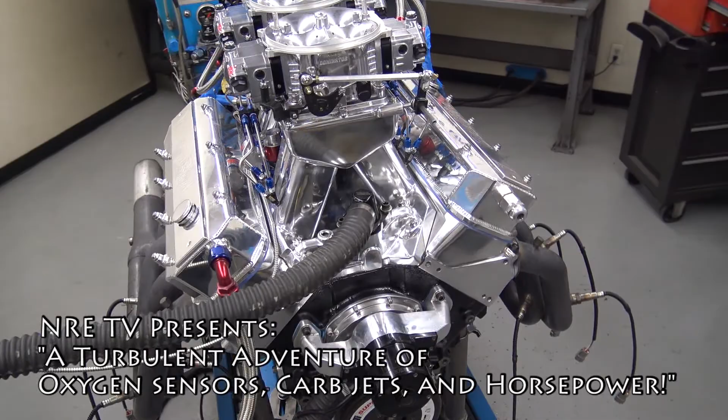632 cubic inch, big block Chevy, Dual Dominators with a tunnel ram. Got an individual nitrous system, and we just made 942 horsepower. And learned a little something from Mr. Brule here on individual O2 tuning on a carburetor.

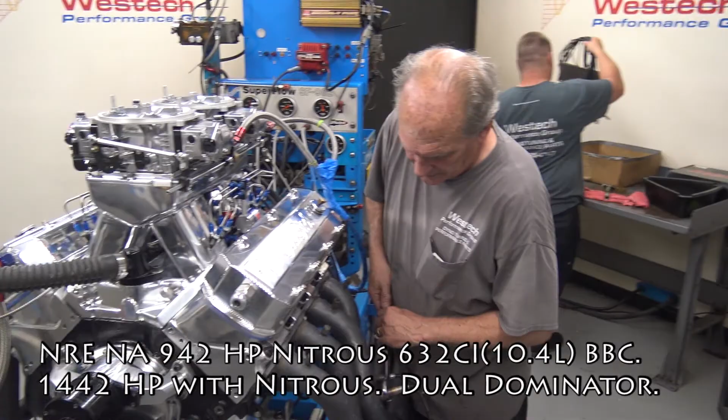Who would ever think it could be that far off? That's crazy. We've got between the biggest and smallest, we've got a 22 jet spread. That's, yeah, 85 to 68. 95 to 68. Oh, in the back. Yeah.

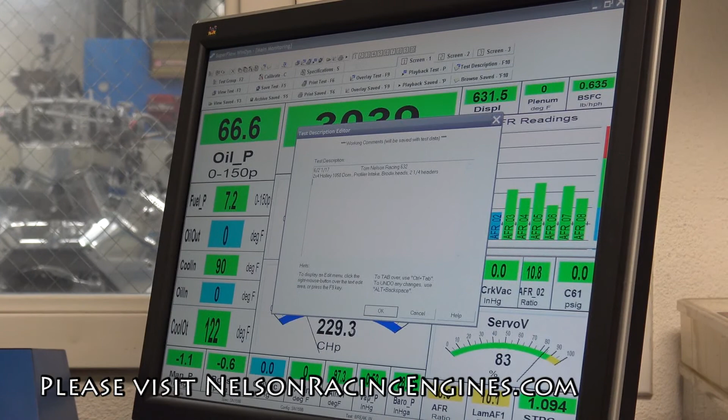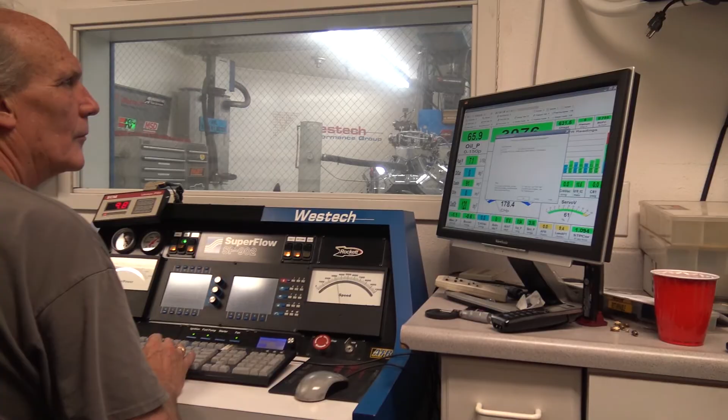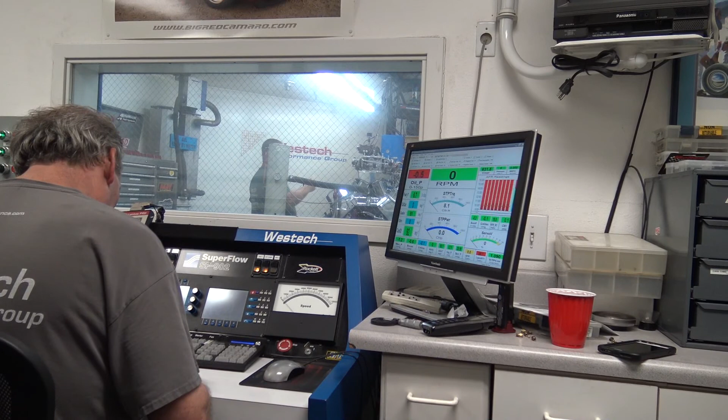So we did a first initial pull, super pig fat rich. Steve stopped a little early, and I think I saw like 886 on the screen. At 6,000. At 6,000. I like the 830 pound-feet at 5,000. Yeah. And that's not peak. 830 foot-pounds, 886 horsepower. I think the floats have to come up some more.

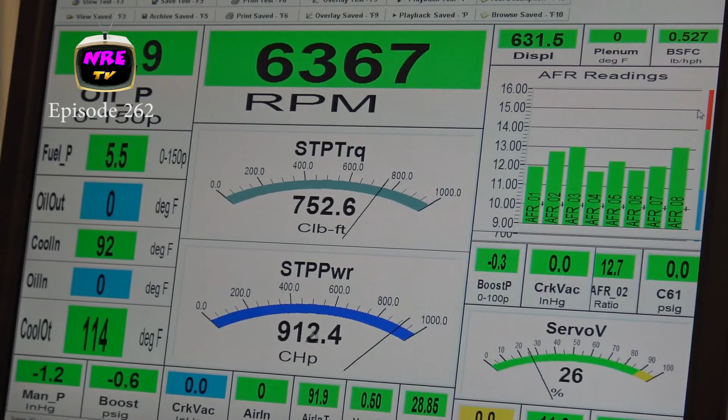There's our first pull. We just pulled 85 in the main to 78 on both, and we're going to re-hit it and see what happens. Nice. I grabbed it a little higher too, but it's not going to want to rev real high with this camshaft and this many cubic inches. What RPM was that? 6,500. So now we'll look at individuals, and this is where we start picking away at different stuff.

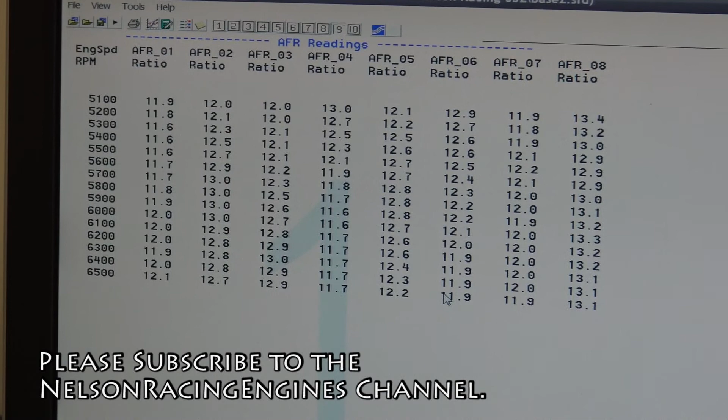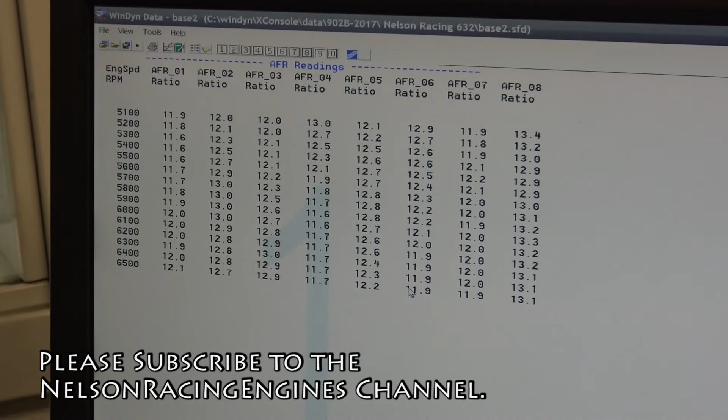So 4, 6. Okay, so I need a pen because now we got to start getting into the individual stuff to clean it up. So what Steve did here, he's got O2s, one on each cylinder. Every cylinder is a different air-fuel ratio. He's going to start jotting down stuff on paper, and we're going to start individually jetting holes to try to bring each cylinder to the correct air-fuel ratio.

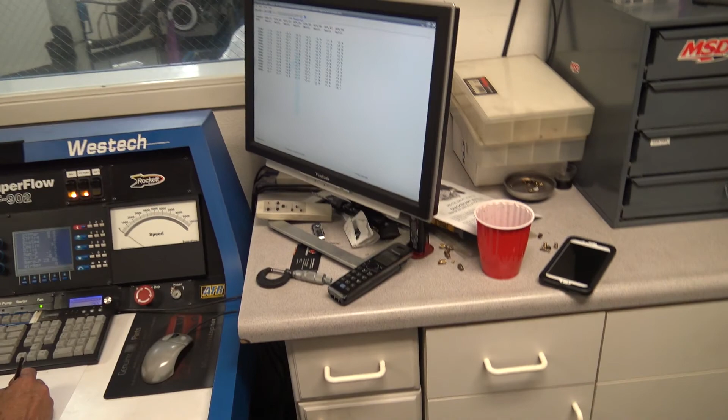Number 3 is okay for now. Number 4 is going to be minus 6, which is good. It helps on the primary side. Yeah. Yesterday when I ran a motor, I had as much as a 110 in 2 holes. 80 in another. That's insane. And it's very normal to have 15 jet number spreads by the time I'm done staring around. Wow.

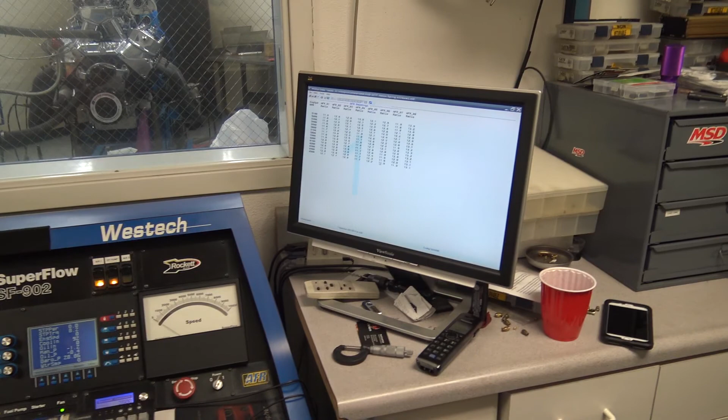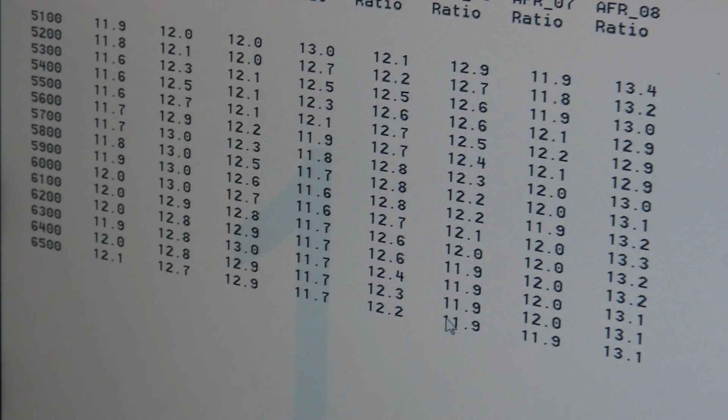On 112, you know, honestly, you can go to 114. Right, yeah. Lose a little torque, but it'll help it carry the motor. Right. Big motor, it'll carry it, yeah.

All right, guys. Sorry for this weird rogue video here, but can't find the tripod, and I'm gonna end up putting this up this week, so you're getting a selfie here.

But basically, the important thing of this video is just showing the individual cylinder tuning with 8 individual air-fuel ratio, 8 individual O2 sensors. So we've got an O2 sensor in every bank, and it's really interesting to see on a carbureted motor with 2 4-barrels, it's basically sitting directly over the runner, CNC ported heads. Everything being the same, the boosters all sitting right over the runners. How different it pulls on each booster in that plenum. There's so much chaos in that plenum. It's amazing to see the differences of what's actually pulling on the booster.

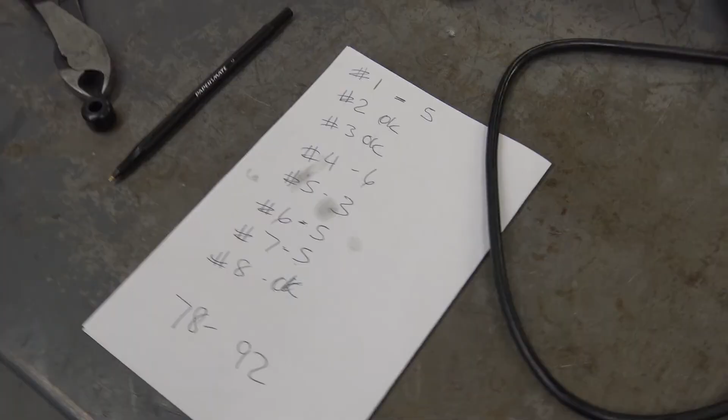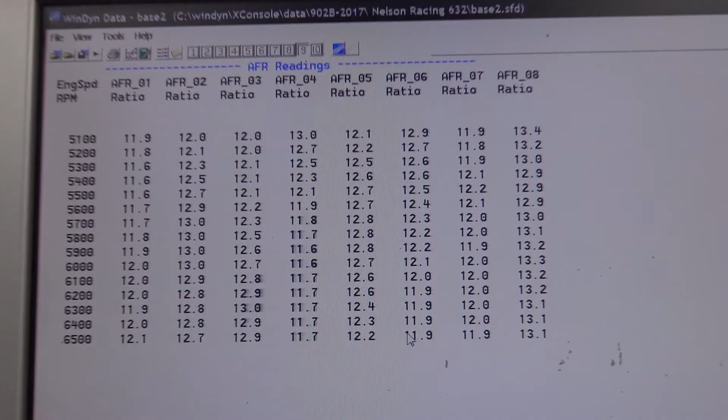So here's our little cheat sheet. We're now at 78 in the front, 92 in the back. And we're pulling individual jets on the secondary. So what you see on these cylinders, where he says -6, -3, -5, -5, on those cylinders we're pulling that much more jet off the 92 number. This is a 78, I need a 72. Let's see what number 4 says. -6.

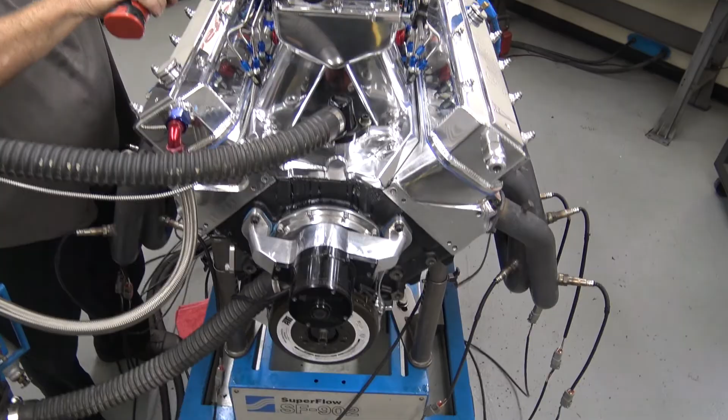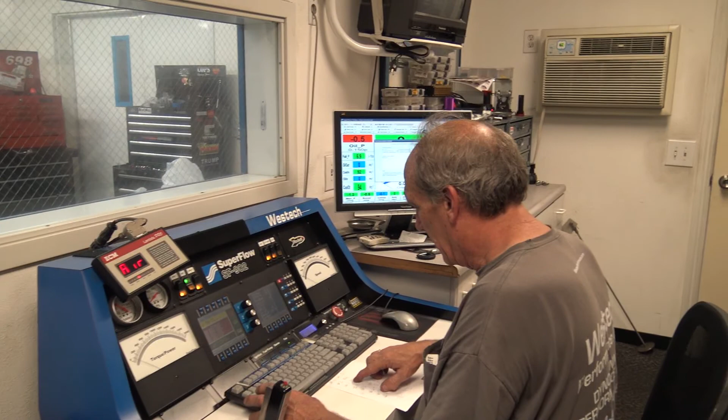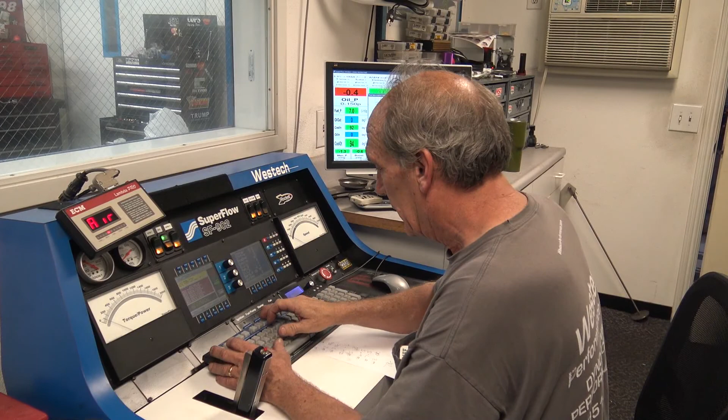Number 1 was a 92, so now it's an 87. Number 2 is still a 78. Number 3 is still a 95. No, 92. 92, yep. So now number 4 is a 72. That was 135, so that's going to be an 87. Number 6 equals, that's a 73.

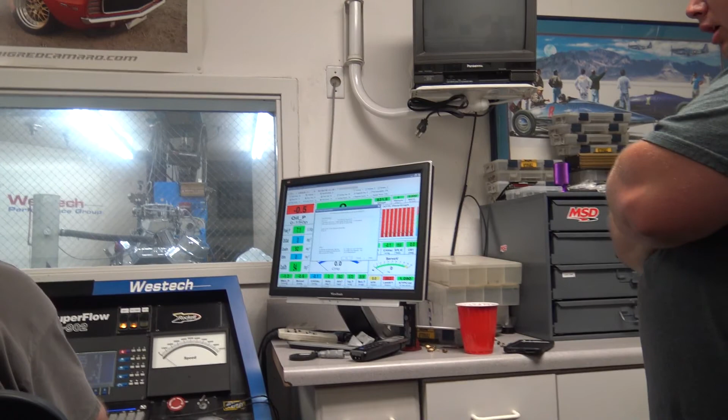That's 9 points, huh? That one? 8. Better, still. It sounds definitely better. It definitely does sound better. It's cleaner for sure. What was it hovering at on the main lambda? 11 out. Yeah.

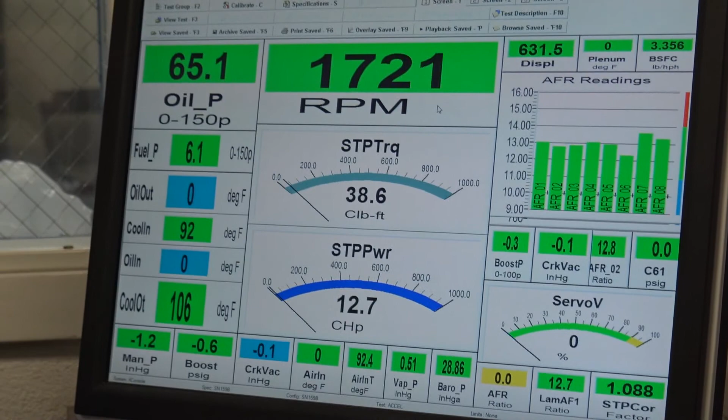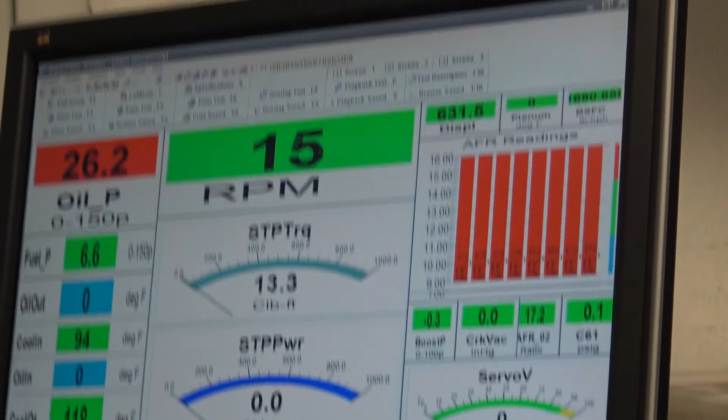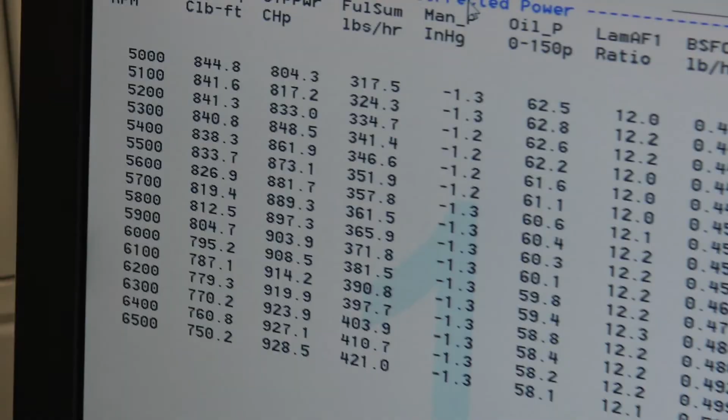Almost 60 foot-pounds I saw. Okay, yeah, I think I saw it at 926 or something. Yeah, 930 horsepower or something. I think I saw 28. 28. Okay. Okay, that's number 4.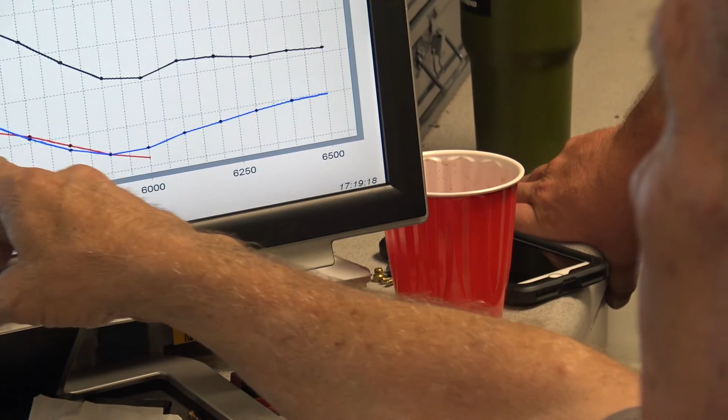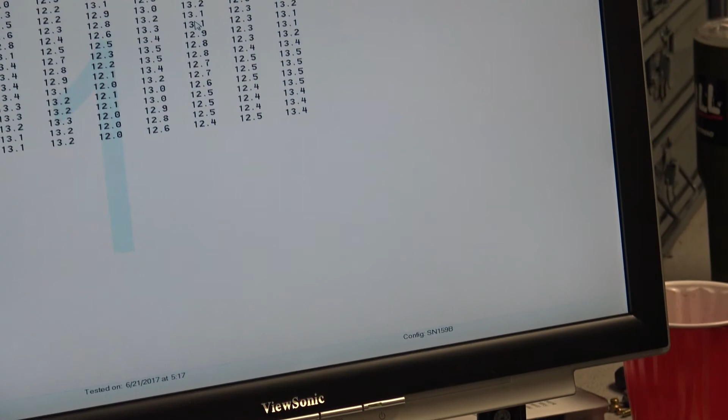See it landed? Yep. So that's the difference between the initial jet and then going to the 72. Well, we went, it was fucking 85 or something. Yeah. And then we went to 78, did one little whack, and so we pulled it out, and it didn't change a lot. Going to 78, and then we went from 78 to 72, and it moved it to here. Yeah. If we can get it over there, that's all we're gonna do. It's just gonna contribute that far out of whack. Yeah. So,

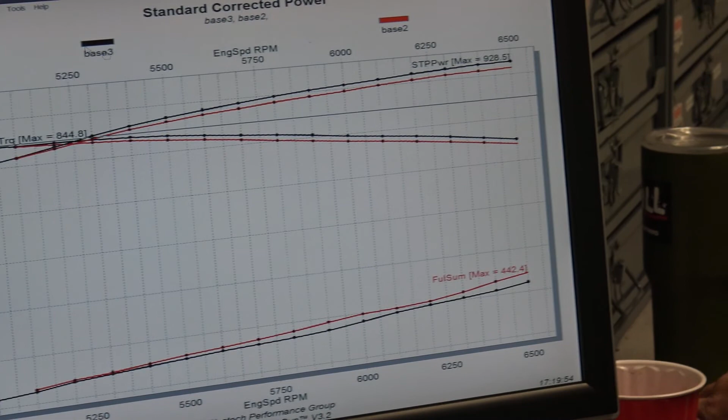So 4 more out of that one. Let me take a look at the rest of them. See, we're down to 6,500 basically. I wanna pull up one more time. Is it laying over at 65, or we have more room? Well, we're flat. I mean, yeah, it's gonna run up a couple more hundred. See, that was just the last couple tinkering around the different jets. Definitely improved at every run. Yeah, sure. Oh yeah. Considerable improvements. Yeah.

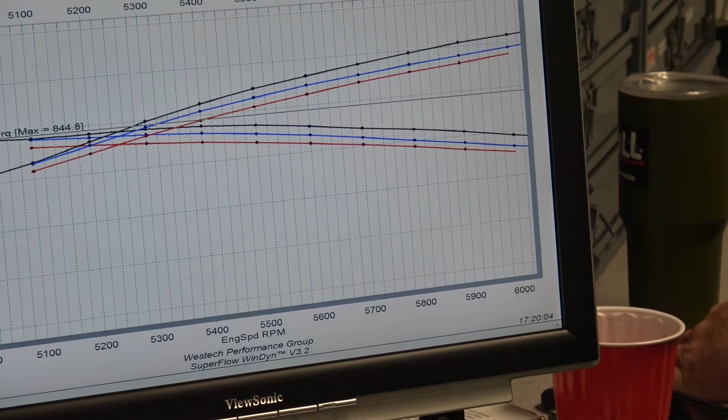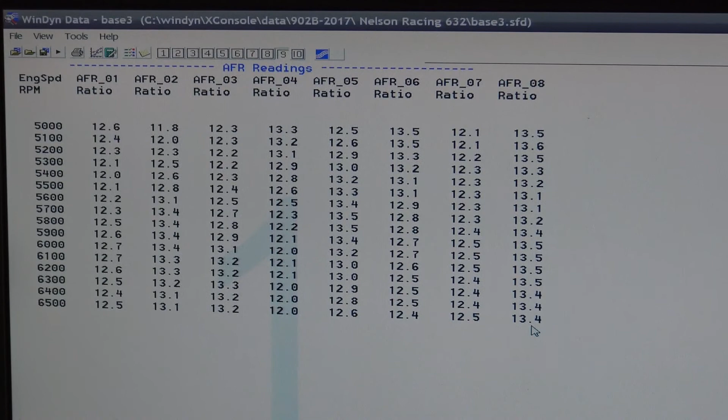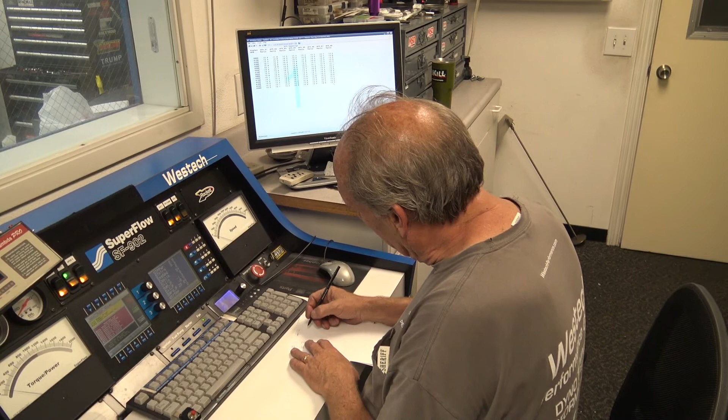So basically we got number 4 being the most drastic change, down to a 72, starting at an 82, or 85 actually. Trying to remember, do we start at 82 in the primary or 85? 85 in the primary. 85. 13 down on 4, huh? All of them were at 85. Number 2. Number 3, number 4.

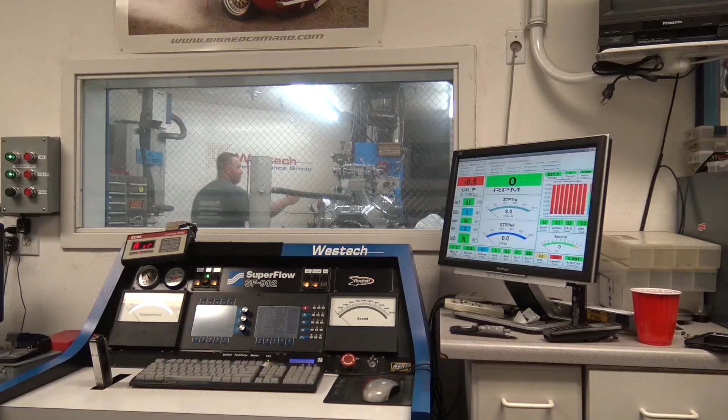All right, so we've done a couple hits and made a good consecutive increase in power with each hit. This is probably our last change to the jets as far as leaning it out. And we'll see what that comes up with. And we might throw a little timing into it and we'll see where we're at. I think we're right around 928 right now. I have a feeling we're going to get in the 30s somewhere. And that's not bad considering that this is a 13 to 1. It's still a reasonable cam, but mellow.

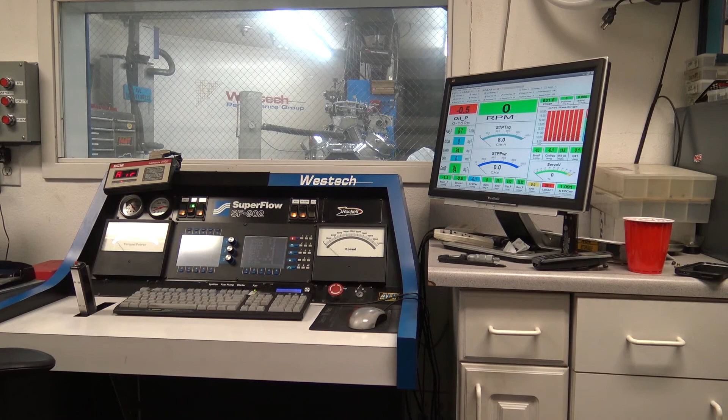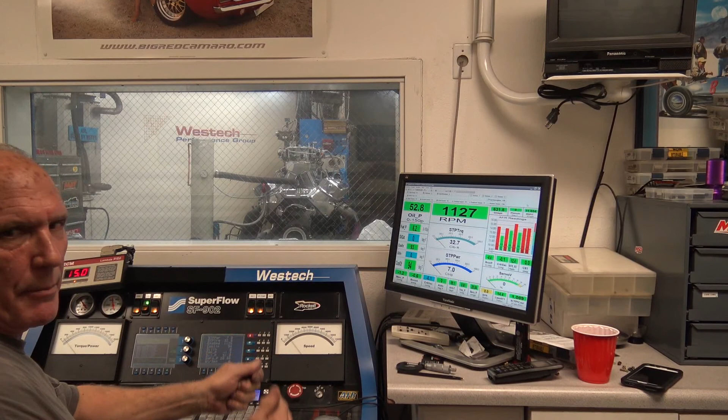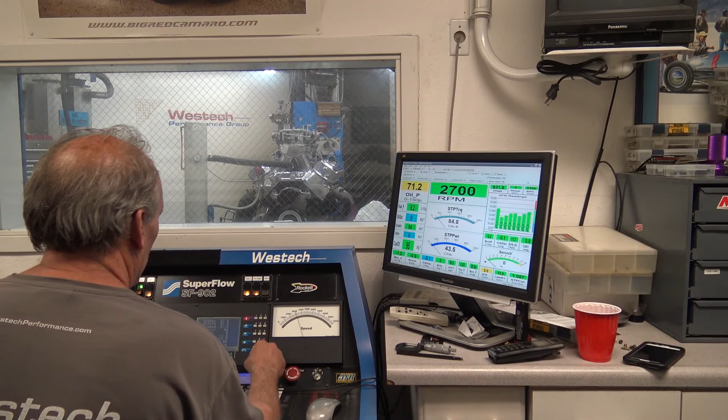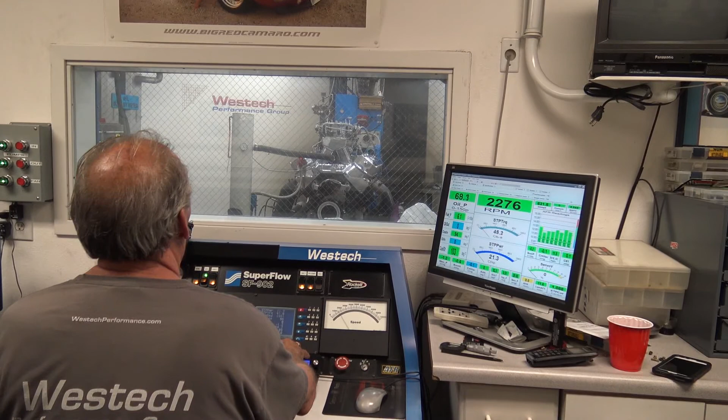Yeah, part of it might be because I drive past and it's pulling it back to the start point. Right. So this is a big number. But I'm going to pull it down a little lower now so we can actually go through the tour. That's not bad for this much cam load. Oh yeah, and that's at about a cruise horsepower requirement. Nice. That was at 9.9 earlier, you know? Yeah. Sounds better.

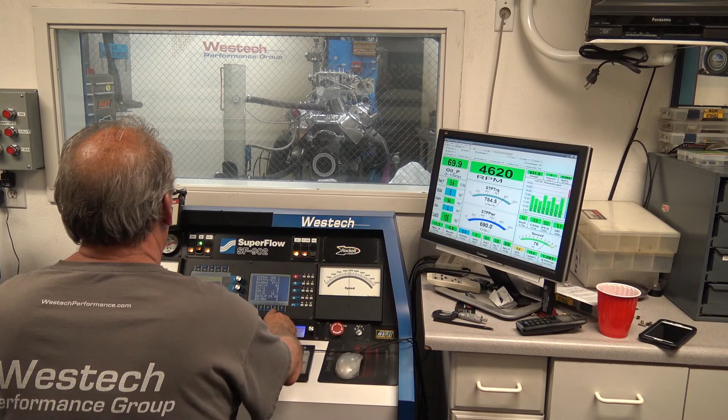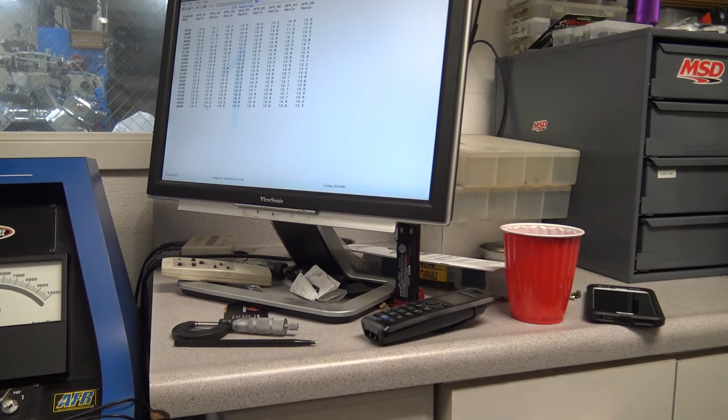Yeah, a little more. Did you rev it a little higher? I revved it 100 RPM higher. Yeah. Saw a 32. We were 28. I don't think these last changes are going to be very significant. Okay, now we're talking. That's pretty decent. That 4 is there. God, it's still rich. See, and now what we could do. I don't even know if I would want to take any more out of that motherfucker. No, I don't. We may want to go. No, those are like 12.9. Yeah, you could almost put a couple back in, keeps it even.

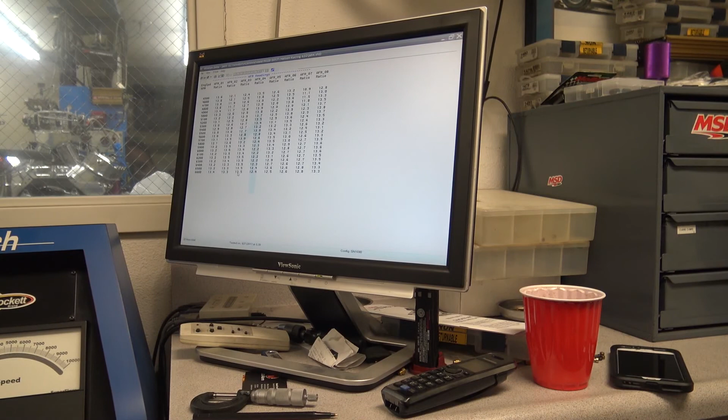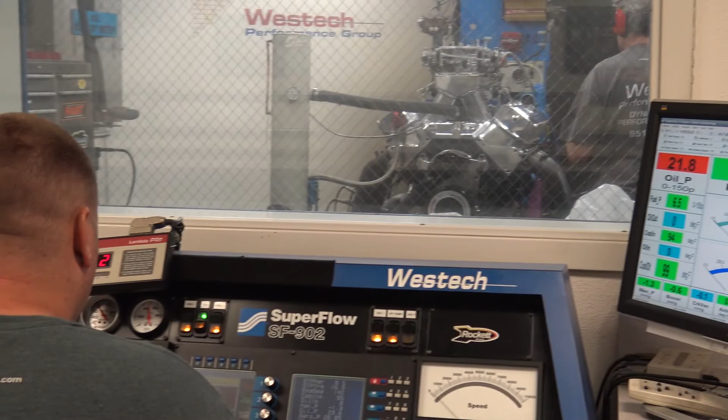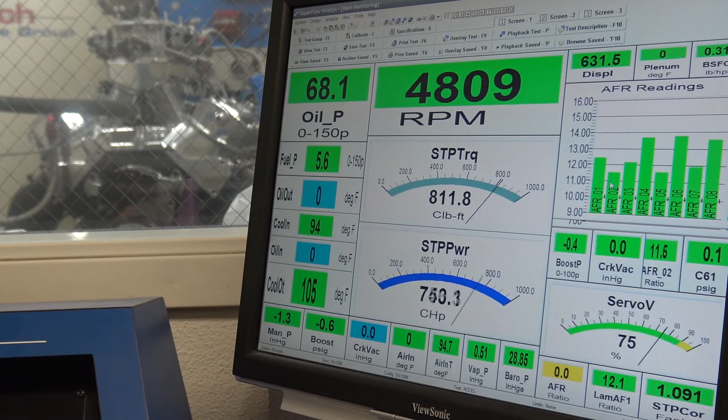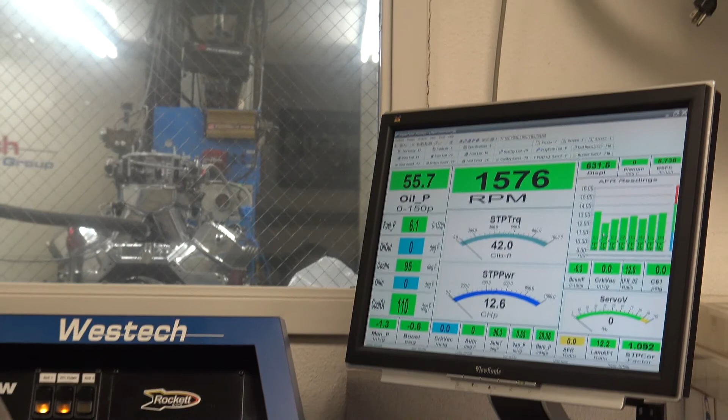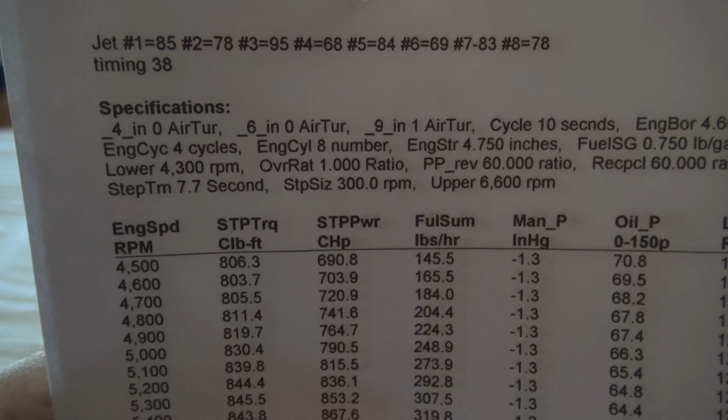All right. So we're going to recap what we did here because it's probably a little chaotic. But basically, we ended up jetting number 1 cylinder 85, 2 78, 3 95, and then 4 68. You can see how each individual cylinder is so different. And there's a lot of things going on in the plenum on a carburetor. I mean, you wouldn't really think that, being that it's a tunnel ram, CNC ported heads, and the barrels are sitting right over the holes. You'd think they'd just all jet the same.

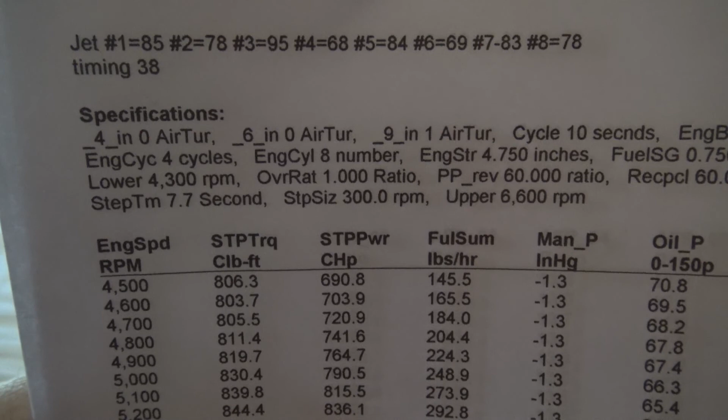So there's all sorts of things that are happening in the plenum. You know, there's pressure waves, there's overlap, there's all sorts of chaos happening in that plenum. And you would think, with the carburetor sitting right over the runners and the runners feeding into CNC ported heads, that all the jetting would be the same, especially on a twin 4 tunnel ram like it is. But it's not.

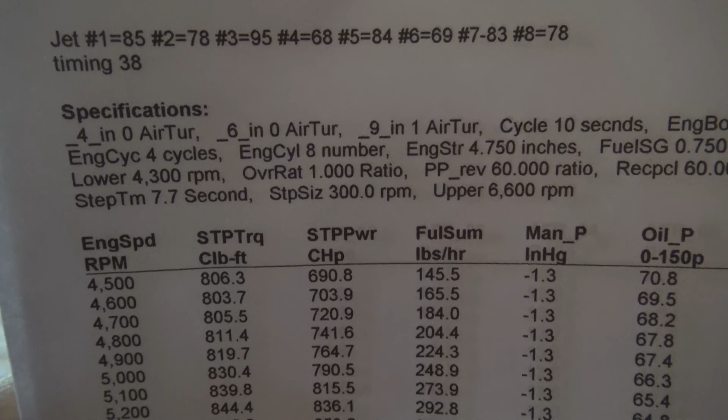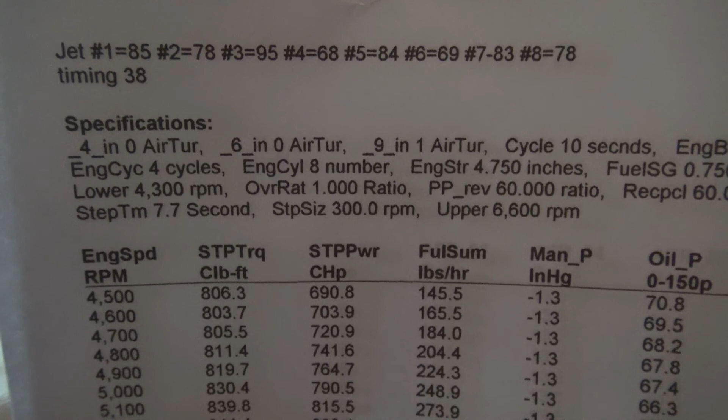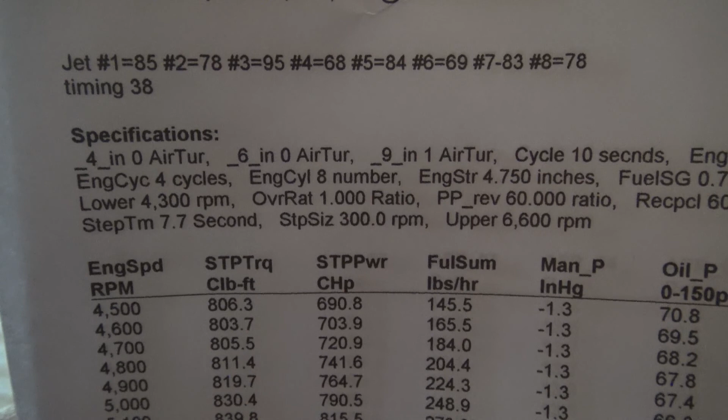And I mean, you look at that and you got a 95 and a 68 between the cylinders. Granted, there's a power valve, that's a secondary and that's a primary, but there's a 68 and an 85 on one of these. So there's just a big change. We took the plug out, did a plug reading. There's a nice little gray line on the bottom of the porcelain. You would think that cylinder number 4 would be lean. It's still on the rich side. So just something to be said.

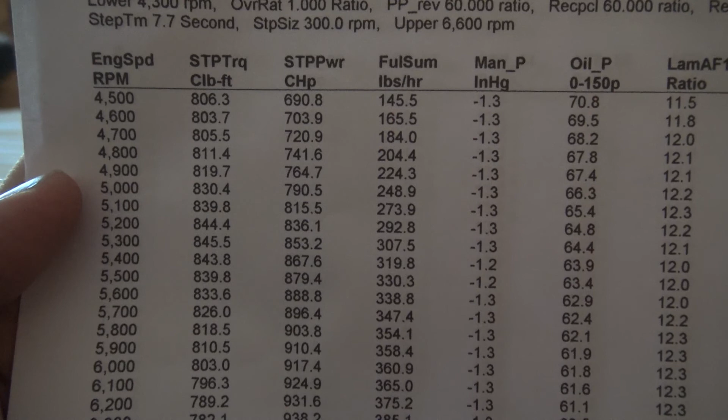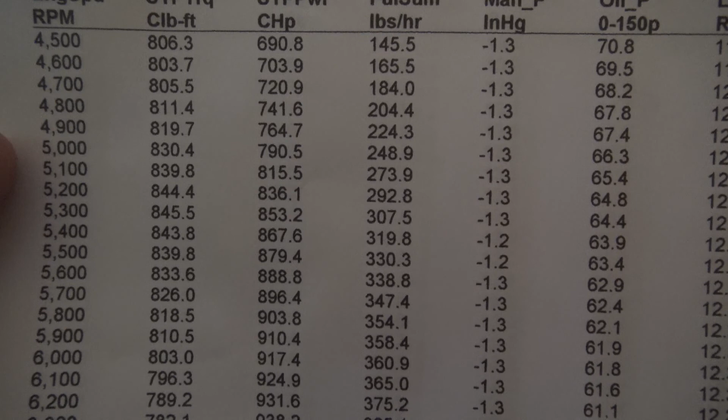Here's a look at the overall numbers here. I mean, the thing's a torque monster. 806 foot-pounds at 4,500 RPM with a peak of 845, and 942 horsepower and climbing. It's a pretty bitchin' motor. It's nothing crazy because the cam is a bit soft, but this is definitely gonna take him and move the car.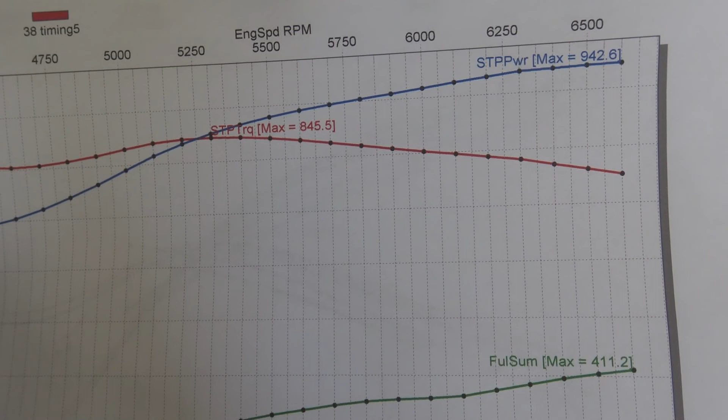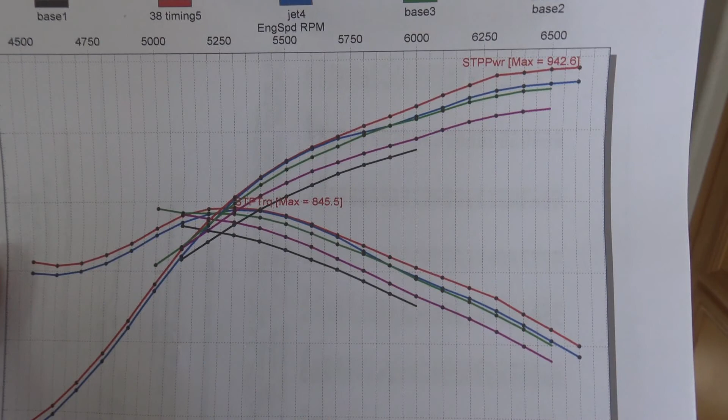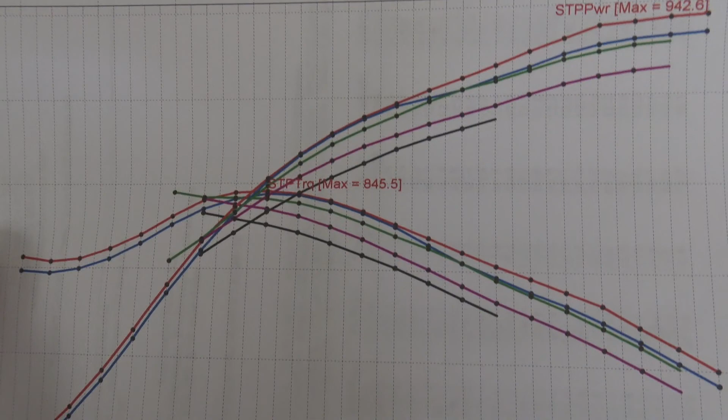Here's a nice graph of the power curve. 845 foot-pounds and 942 horsepower. But what's more interesting is the second graph. Make sure it's in focus here. The second graph shows where we started out at with jet. Our bottom black line right there is the original jet that was in it, which would actually be considered a very close jet. That was an 85, 95: 85 in the primary, 95 in the secondary, power valve in the front.

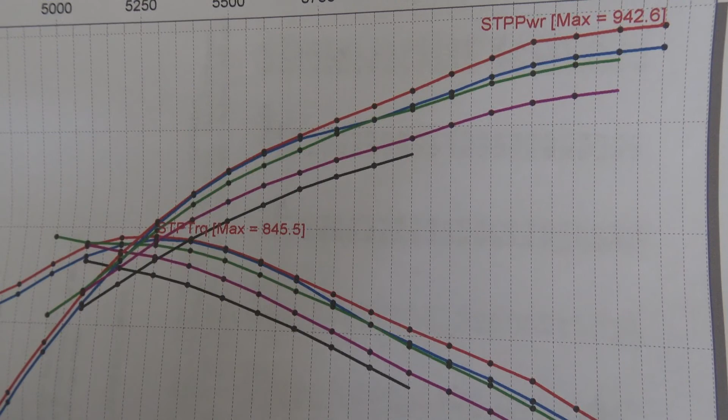Then we went ahead and pulled it to 78 straight across. It liked it, definitely cleaned up some of the rich areas. On a Dominator, it's always a nightmare to try to get part throttle and cruise working correct, especially with 2. So even pulling it down 7 numbers all the way across the board on 4 jets, still 10 to 1 on part throttle. Nice at idle, but really rich at idle. Really rich at part throttle.

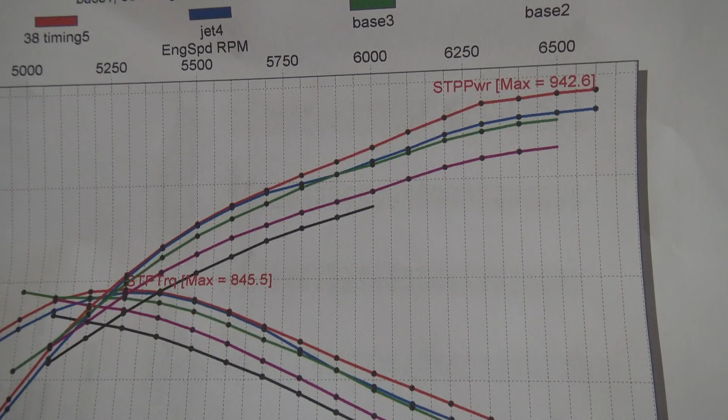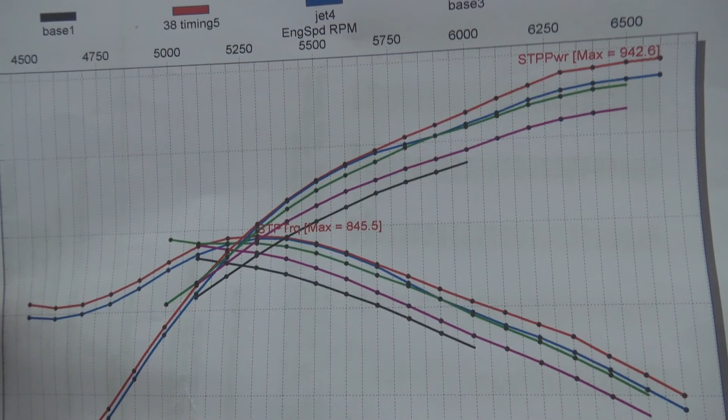Then we started staggering, and with each pull you can see the stagger increase, and in the end we staggered one more time and bumped 2 degrees of timing in it, and we ended up making a little over 60 horsepower more. So really cool to learn about trimming individual cylinders on a carbureted motor and all the cylinder variance that's going on. Air fuel ratios of, let's say, 10 to 1 on one cylinder and 13 to 1 on another. It's cool to point that out.

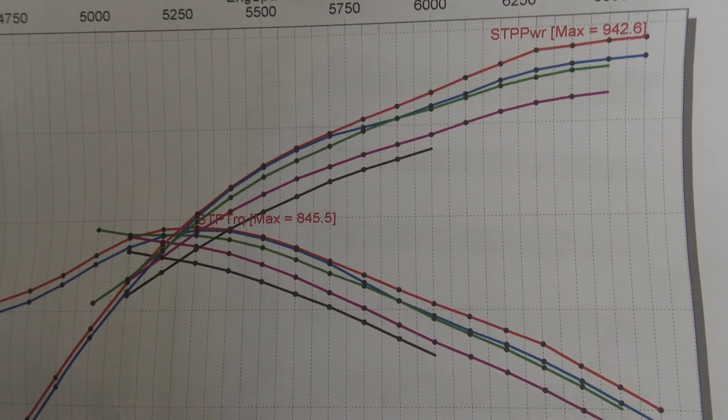It was nice to be there and hang with Steve and have him show us those little tricks on the carbureted motor, and it was real fun to see and work with the guy.

Another thing that you try to accomplish with the Dual Dominator big block is to get at least some sort of reasonable air fuel ratio at cruise. When we started, it's idling at like 14 to 1 air fuel ratio, but the minute you get into the throttle, 9.8 to 1, 10 to 1, and that's always the fight with the Dominators, or just big tunnel ram plenum, big cammed big blocks.

So we just kept trying to lean out the primary side. We ended up getting into high 11s on cruise. You could hear it get crisper and crisper, and at part throttle it got much better. So that was another thing we were working on in the dyno to make it streetable, because even though we can call this a race car engine, he's gonna occasionally drive it on the street and he wants the enjoyability of not having it gurgle the whole time.